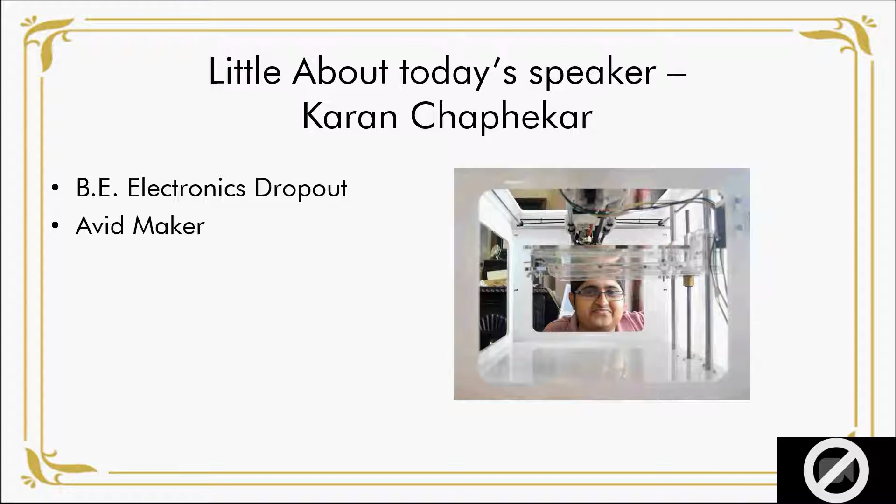A little bit about me. I tried to do my Bachelor's of Engineering, but I was not good at academics. So when I dropped out, I was doing these kind of projects. This is one of my printers.

So let me explain what a 3D printer is. A 3D printer is an additive manufacturing method. Instead of taking a block of wood and carving it to make our object, here we are adding material to make it.

This technology is about 30 years old. It was used by NASA also for some space shuttles. But why are we talking about it now? The reason is patents. The patents for this technology, FDM technology, which we are going to focus on, where we put the plastic material using a mechanical system, expired around 2009. Because of that, the project started in parallel - let's try to develop our homegrown 3D printer. So that was the concept.

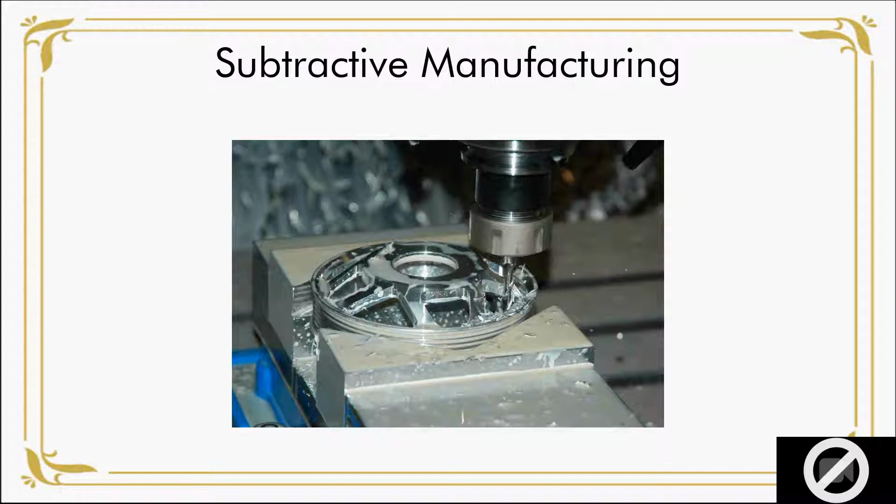This is an example of normal manufacturing that you might know of, where you take the whole material and using a drilling machine, or what they call end mills, you try to make your part, whatever you want to make.

One more thing I want to mention is this whole project is not my invention per se - it's more about the implementation that is unique to myself. This is a whole open source project. What open source means is that the main files, whatever the software, whatever the hardware, are freely available, so you can also make your own 3D printer, because the community of 3D printing enthusiasts have come together to make this possible.

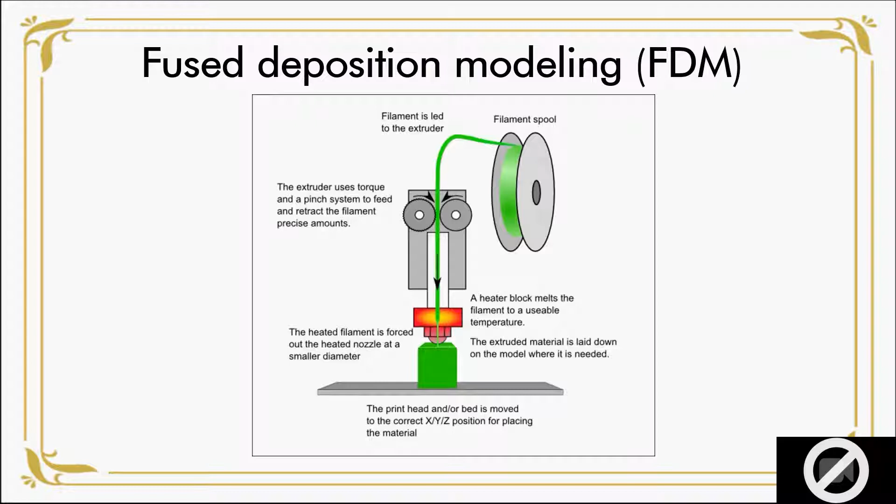So let me give brief information on the main parts of an FDM 3D printer. You can see a filament spool up there. That green filament spool goes inside an extruder. An extruder is basically like the sugarcane juice machine - ganne ka juice - you can imagine the sugarcane going in and the juice comes out. It's very similar to that, and there is a heating chamber with a small hole where your melted filament comes out.

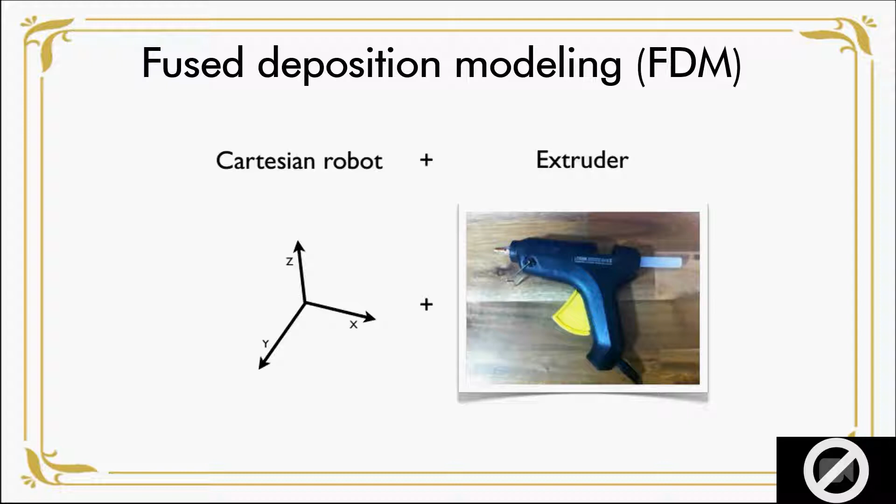The fused deposition modeling method is what we are using. We are using a robot to move an object, and for the extruder, you can imagine it as a glue gun. So what we are doing basically is squirting plastic on a surface, and where the plastic is squirted is decided by our 3D printer. As one layer is solidified, we build another layer on it.

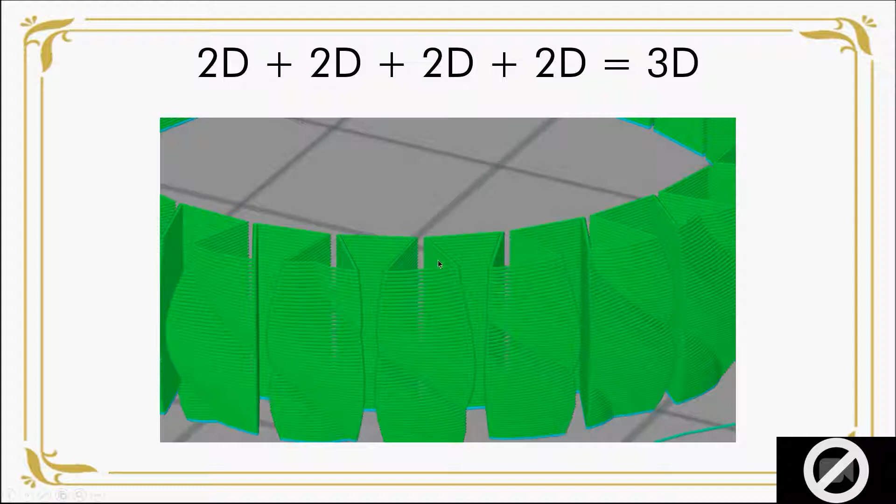In this photograph you can see these lines, made out of plastic. This is the hardware, as I mentioned, X, Y and Z axis. X is left and right, Y is back and forth, and Z is up and down.

What happens is you require a 3D model to make this. A 3D model is not a photograph, you have to understand. It can be made by 3D scanning, which is one technology that's not common, or by using AutoCAD-like software. We are going to use another software called Tinkercad today to showcase it.

With these systems, you can make whatever you want in 3D modeling. It requires a little bit of skill, but once you've made that 3D model, the software developed for the 3D printer can take that model and recreate it with, I would say, 0.2 mm accuracy on the printer.

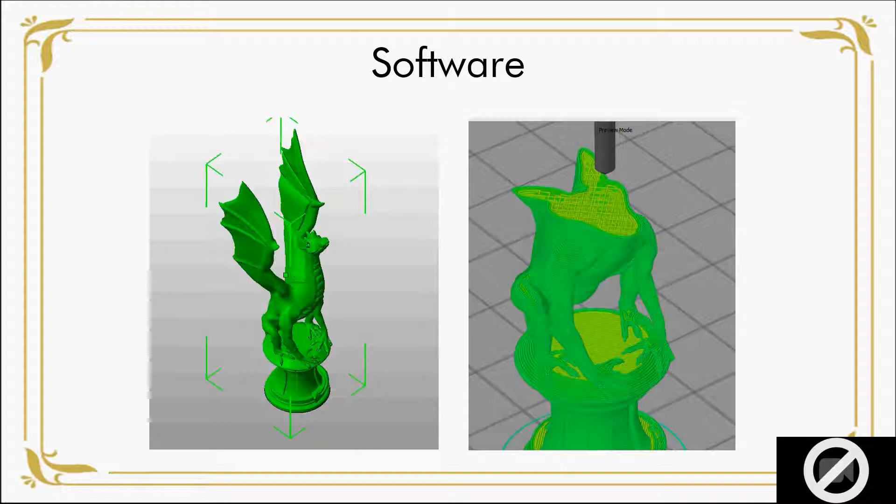So what you saw on the left is the 3D model, and the right is what the software came out with. The software decided where I want to put the plastic and how, and after that you have the 3D print, the object that was designed before.

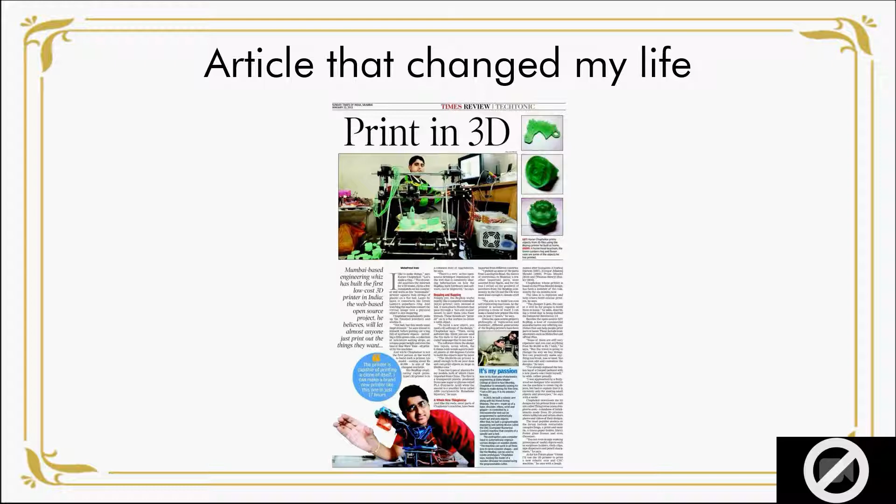This is the 3D printer. This article came in Times of India. These are some of my 3D models.

When I started making this, I started selling these also as kits, so whoever was an enthusiast could buy them. This is the one I was showing in IIT, if I'm correct.

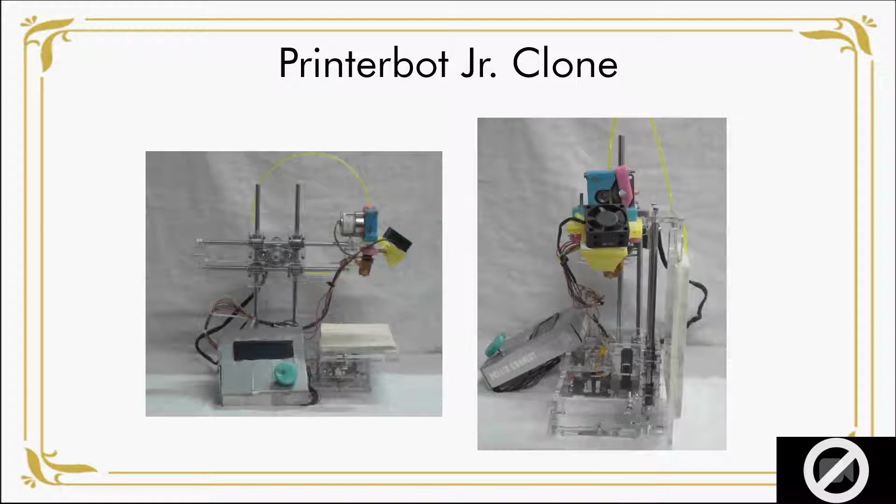This is another 3D printer. If you can see on the right, it actually can fold itself, so you can fold it and carry it. It's a sort of a clone of another popular model, and you can fold this.

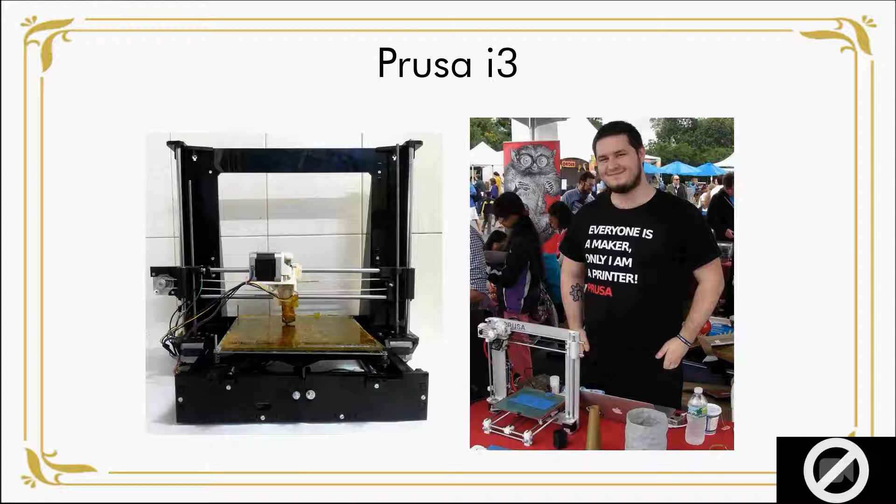He lives in Czech Republic, in Prague, and right now his 3D printer line is, I think, the most popular in the world. They are all open source, so they don't keep any patents, and they are still making business out of it.

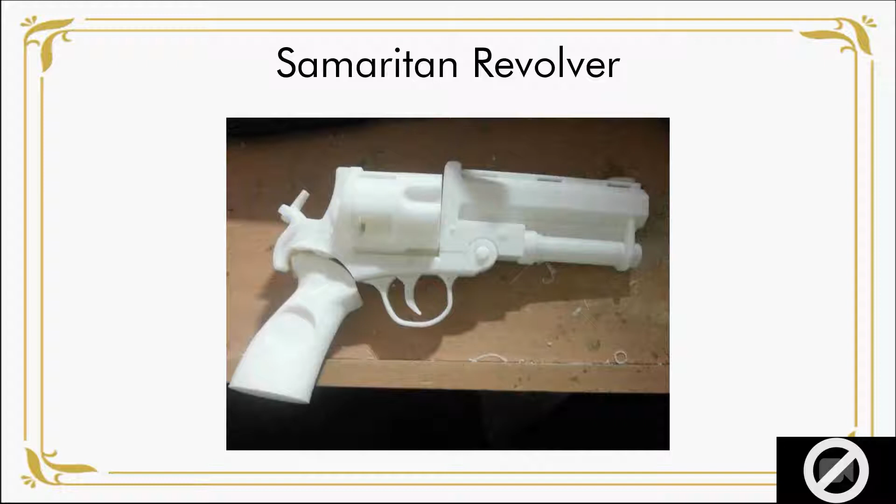This is a movie called Hellboy, and you can see this gun in Hellboy. So what I did, I downloaded the 3D models and made this gun on the 3D printer. Of course this is not a real gun, it's a toy, and I just painted it.

You can change colors in between on 3D printers. Different colors you can make.

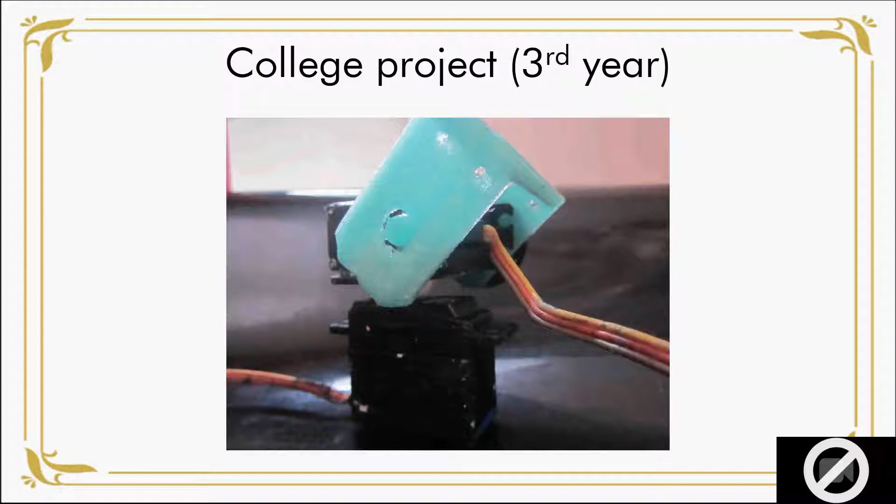This is my college project for third year. It was basically a CCTV camera model.

One more advantage of 3D printing is you only have to carry the raw material. If you want to make a spanner for a specific specification, you'd have to carry every spanner because you don't know what you'll need. But with a 3D printer, I can just take a piece of plastic and print it wherever I want.

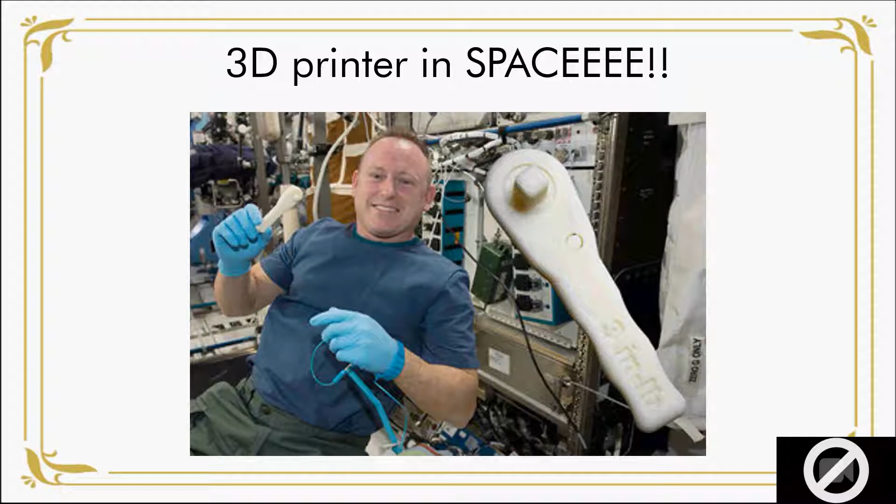So this is actually a wrench made in the International Space Station with a 3D printer. So the technology is very versatile.

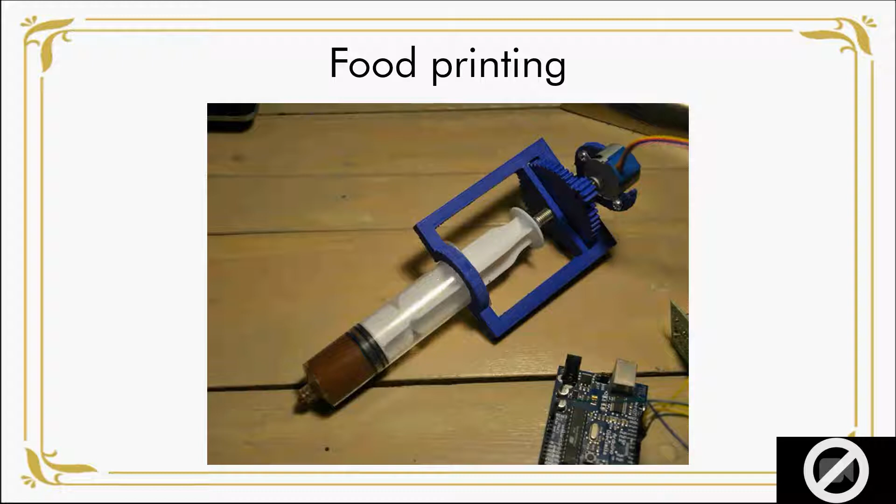Now with 3D printing we can extrude plastic, but we can also extrude other materials. So this is an example where chocolate is inside the syringe, used to make a chocolate 3D print. You can make a small toffee or chocolate in whatever shape you want, completely customizable. You can imagine these things in 5-star restaurants or high-end cafes where you want something very customized.

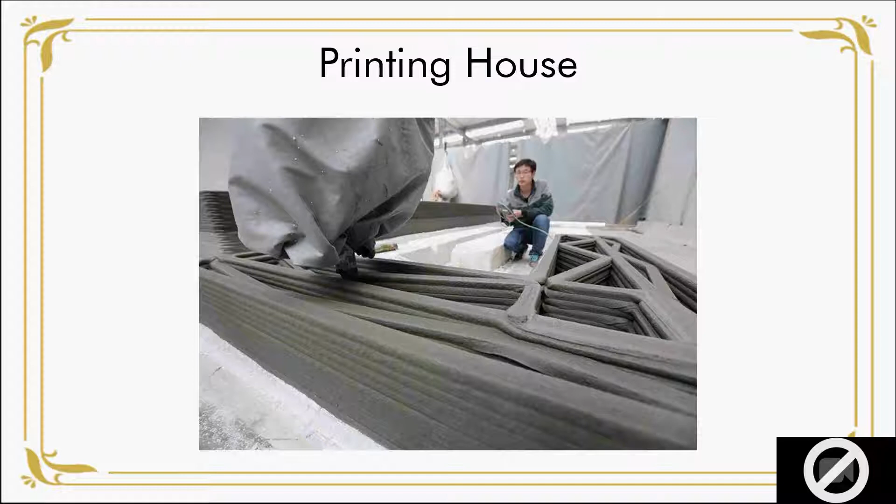This is another thing - you can 3D print houses, also in China. This is a 3D printer depositing concrete layer by layer, making these houses in 24 hours. So you can imagine how fast you can do 3D printing even at large scales.

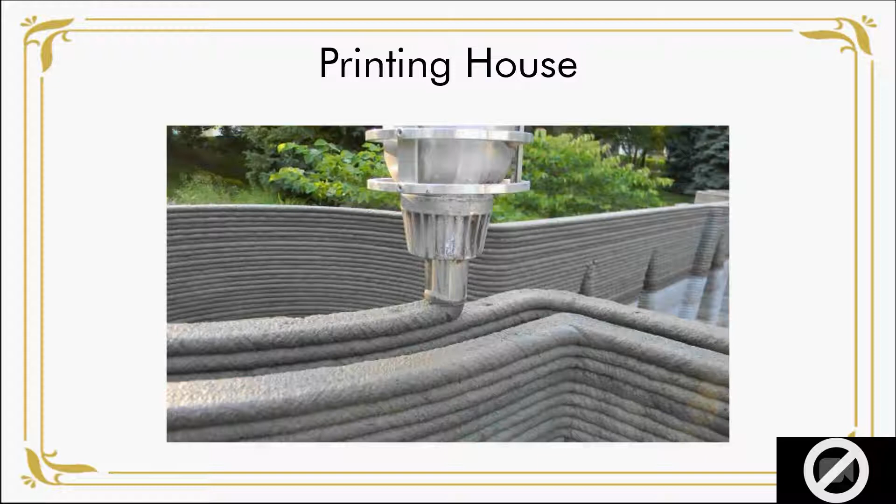This is another one - this was not in China, it was, if I'm correct, in America, made by a father for his daughter because she wanted a princess castle. So he made a 3D printer which can work on concrete, and made this castle out of it. It's a very wonderful thing.

So that was the presentation, and now we will move to the 3D printing part of it. What we are going to do today for demonstration is go through the whole cycle of 3D printing, which starts with designing. So we are going to design it.

What we are going to use is a website called Tinkercad. You can go and register yourself whenever you have free time. This website is basically a 3D modeling software, but you don't have to download it - it's online.

So on the right side you can see there are various shapes here, and you drag and drop these shapes onto this main page. You can zoom in, zoom out, change the size of this, and put in exactly how many millimeters you want, so you can make your objects out of this, and you can combine and subtract.

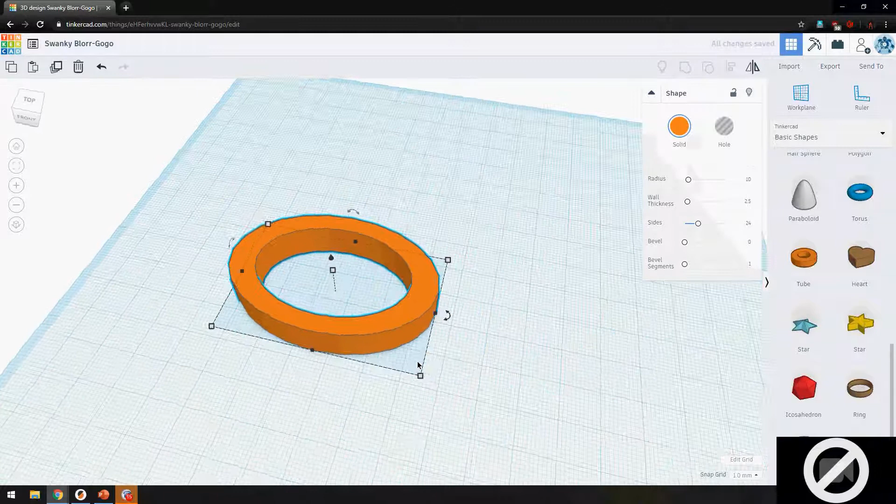For example, let's say I have this block. I can name it green, I can color it green - the color here doesn't matter, because color is only for representation here.

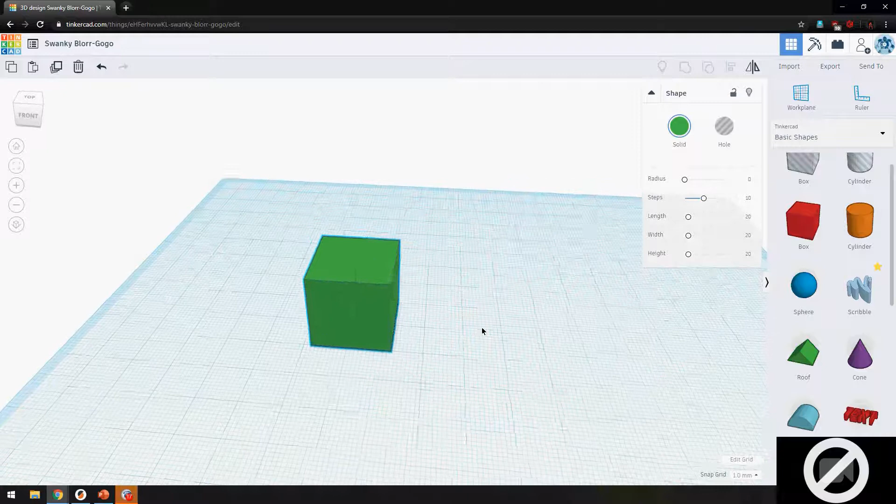Imagine I take another one - let's say I want to make a small house, so this is a roof. I can keep this roof on top, and then I select both of them and click merge. So what happens when they are merged? They are now one piece - they are no longer separate pieces.

Now, on the other hand, we can take any other object, and as I said, I can change the color, so I can set the color as hole. Hole is, you can say, like a negative - so I define it as a hole, and when I group this together, it carves the piece out from my main model.

You can see the spherical part is carved out. Okay, so using this method we are going to make a simple keychain.

So what we are going to do today, we are going to take this text format. So we have this text, so we are going to type something here. So we'll write MSS.

This text has a height of say 10 millimeters here, but because we want to print this model also, I'm going to decrease it to just 5 millimeters. So you can see we have made this text.

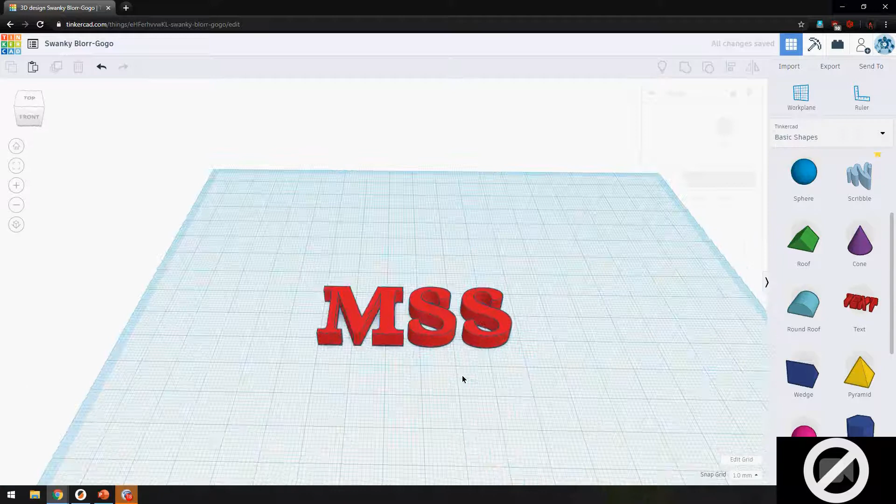Now if I go and 3D print it right away, what will happen? It will create 3 letters MSS, but they are all separated, like letters used in number plates or something. So what we are going to do, we are going to take a box.

Okay, so these alphabets, if I print them as it is, they will come separately. So what we are going to do, we are going to take a box.

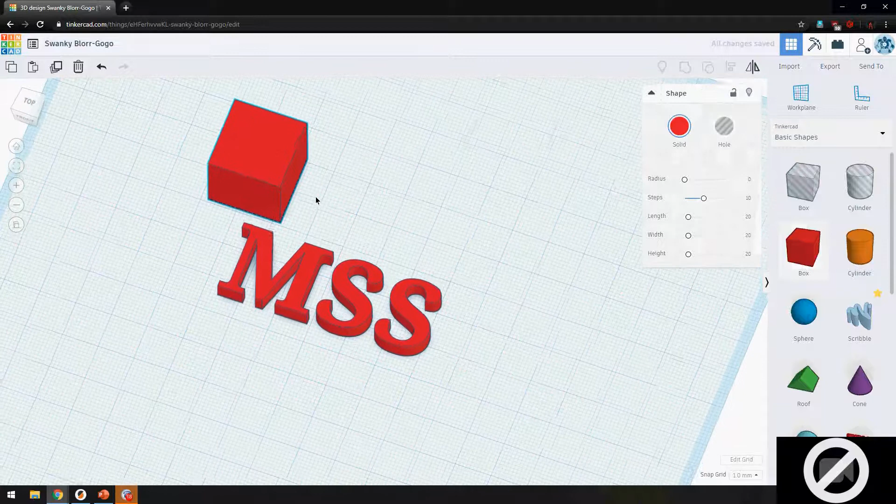I have taken this box here, and I am going to put the height as 2 millimeters right now. I will slow down a bit. Then let's color it differently.

Now what we are going to do, we are going to increase the size of this box. We'll make sure that it fits this size. So if you can see it here, MSS is on this plate.

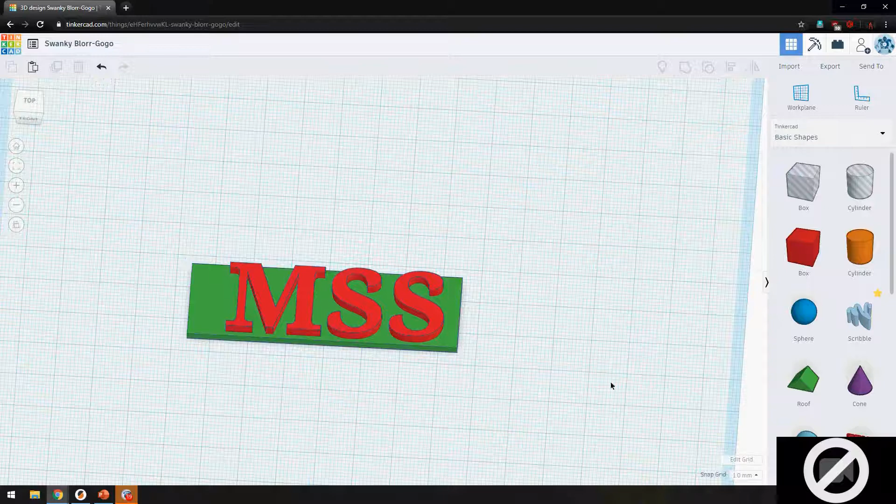Now when I print this, what will happen, because of this plate, this will be more like raised lettering, or whatever is opposite to embossing. So what we are going to do, as we are making this as a keychain, we require a keychain hole. So we are going to take one cylinder.

As I showed you before, we can combine objects, and we can also remove them. So I will define this cylinder as a hole or negative cavity. I'm going to make it smaller.

Let's say 10 millimeters by 10 millimeters square, so I can type 10. I will zoom in so you can see it clearly.

Now we are going to take this cylinder I made and put it where I want my hole.

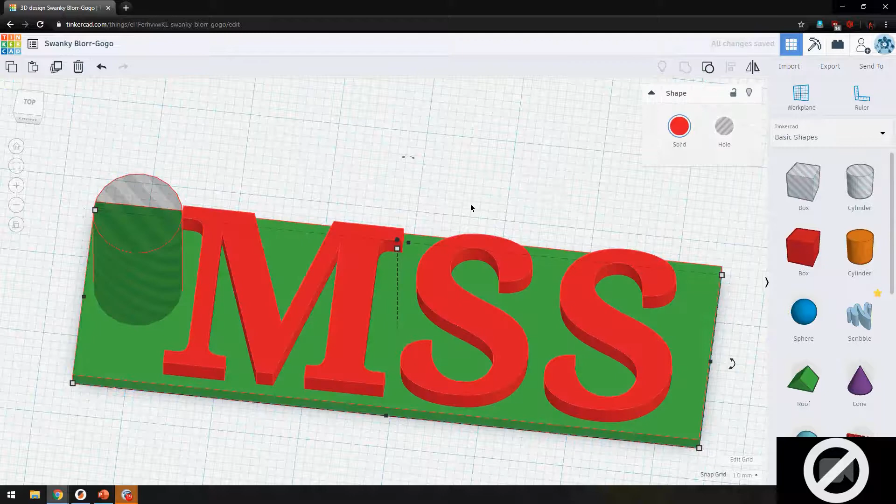So what will happen when I combine all of these three parts, which is our MSS lettering, the base plate, and this hole, it's going to make this into one object. But as you remember, we kept the cylinder as a hole, so what will happen? It will just remove that part from my main model.

So what we are going to do, this keychain is ready. It's a very simple design, and we are going to export it into a format called STL.

So if you know Photoshop or CorelDRAW, you know you can export a file in a format called JPG. We are all familiar with JPG format, it's a very common format for our photographs. But once you have exported it, say from CorelDRAW, it's hard to edit it. Similarly, with the STL format, when you export it, you can't edit it easily.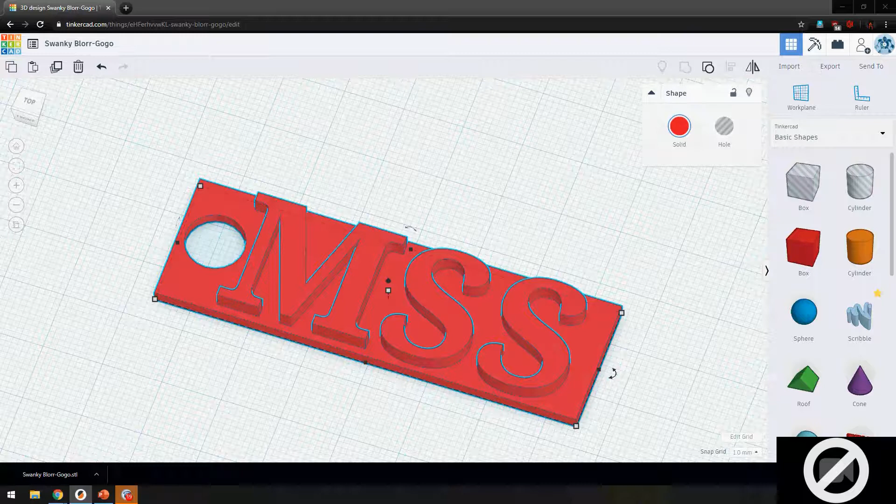So I'm going to save this, and now I'm going to introduce another software which we are going to use very briefly to convert this model so my 3D printer can understand it. These softwares are called slicers, and they are specifically made for 3D printers only. What they do is take a 3D model and convert it into a language that my machine can understand.

Yeah, we can use Blender also, we can use any 3D software. I got a question, yeah, you can use Blender also. So what will happen, we are going to import our file we just downloaded.

You can see it here. So this square piece is my build plate of my 3D printer. So this is as big as I can make an object. Also there is a height limit, but it is not shown here.

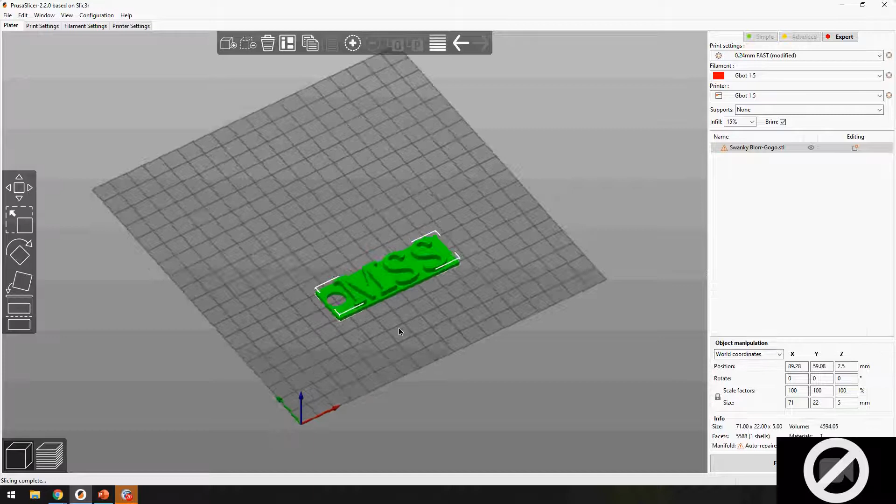So I'm going to just place this in front, and there are a lot of settings involved. I'm not going to go in depth on the settings, but basically I select the settings. I will answer the questions afterwards, when we are 3D printing, I will go through the chat and answer them.

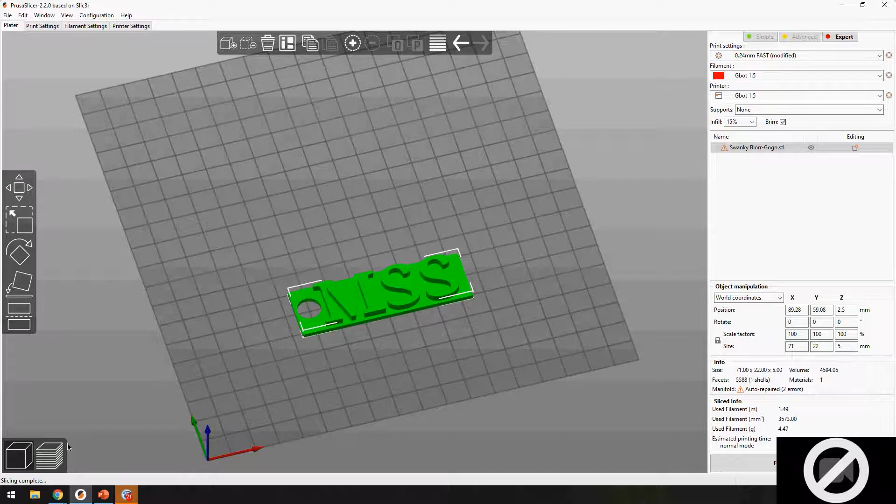When we are 3D printing, we don't actually print complete solid objects because it's a waste of time and materials. So we tell the software that we want a certain percentage of fillness, called infill in 3D printing terms. We have set it to 15%, so right now the object is filled by plastic 15% by volume.

As we go further, it closes our top plate and then goes for the lettering. This whole print will be 21 layers and it is going to take 20 minutes. So what we are going to do now is send this file to the 3D printer.

Now my 3D printer is attached to my Wi-Fi, so I don't have to connect it to my PC. In other 3D printers the method is that you require an SD card, but we are just going to send it to our 3D printer wirelessly, and it starts 3D printing.

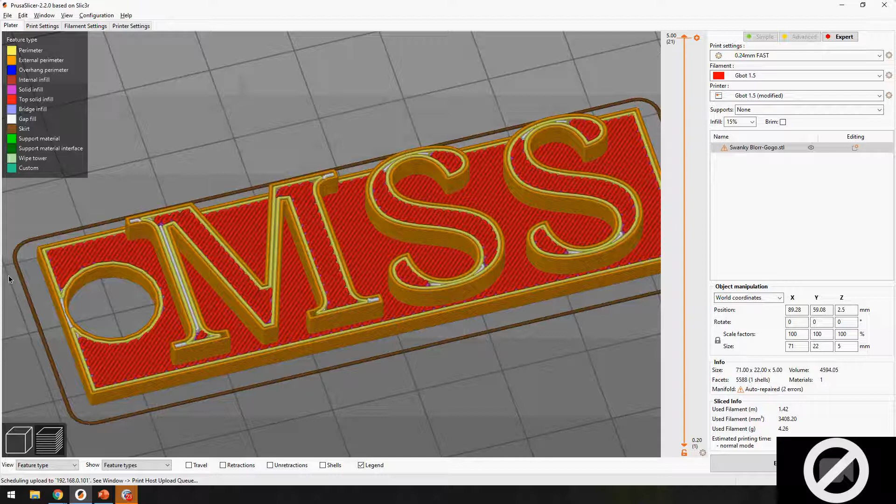Right now I will show you another view where you can see my 3D printer's interface. This is something called OctoPrint. It's working on a Raspberry Pi if anybody is interested. It's basically a small computer on my 3D printer which makes its own server page, and I connect through that.

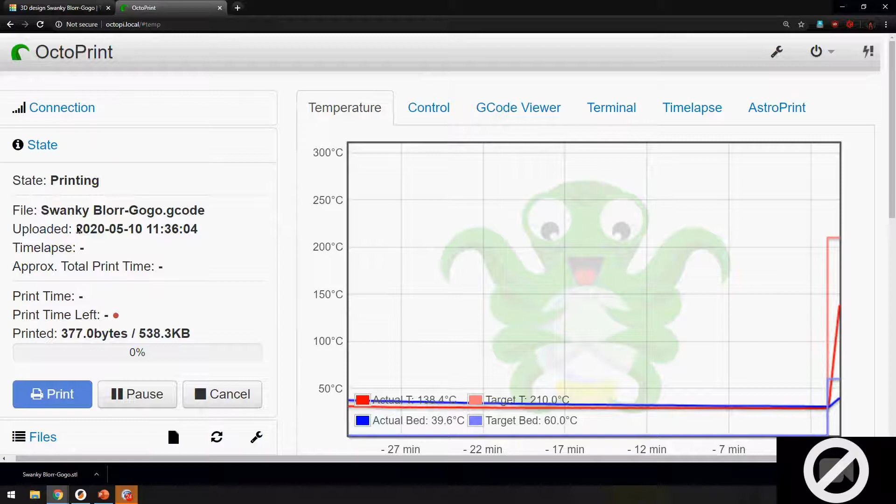So you can see these graphs here, let's see if I can increase the size. You can see that our temperature is increasing. I told it to increase the temperature, and this is a random file, this is when it was uploaded, and this was the size - it's half a MB of a file.

If I show you the same view, I can see it here, the G-code view. Let me explain - this is basically a live view that will show us what is getting printed right now on the machine. After this, when the 3D printer has started, I will move to my phone camera and show you the 3D print.

Plus one more thing, actually I can show you it right away. I've attached a camera also, so I can monitor it from anywhere. It's actually connected to the internet too, so if I'm somewhere else, I can connect to my 3D printer and see the progress. What you are looking at right now is the head of the 3D printer.

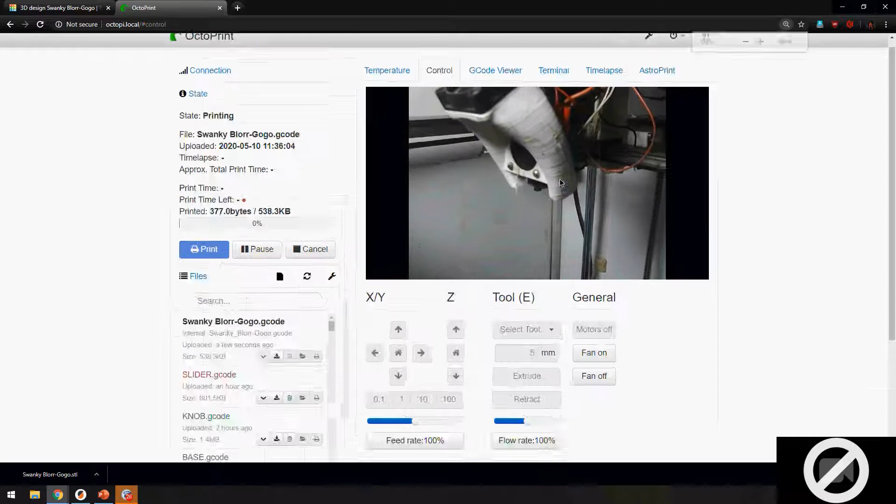Now I'm closing the presenter access.

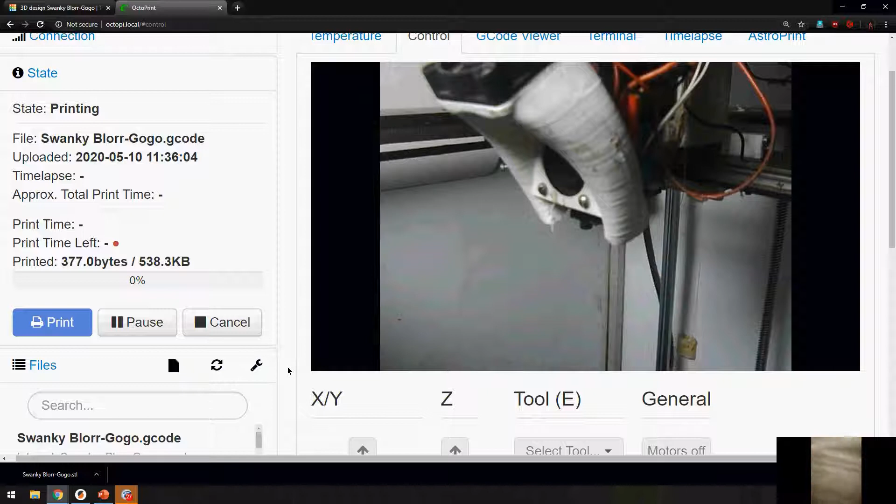So I will show you my phone view. You might have to click on the camera view that I have, and I will show you the 3D printer. Just on the top right corner, if you can see, there is Karan's camera view that is already on. Karan, if you turn off the presenter screen, you can actually put it on main view, or do you want to show something on the screen?

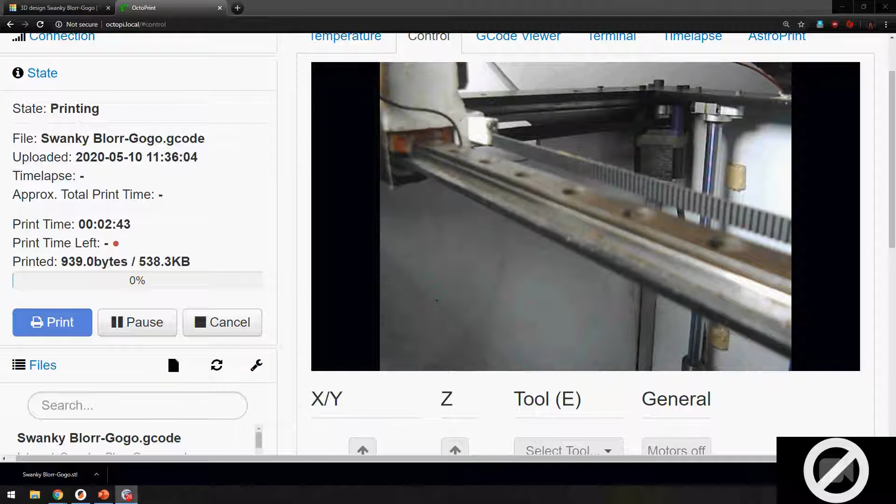So this is the 3D printer. Let me try to explain what is happening. On the back, these are two motors here which are controlling this center section. So two motors in the background.

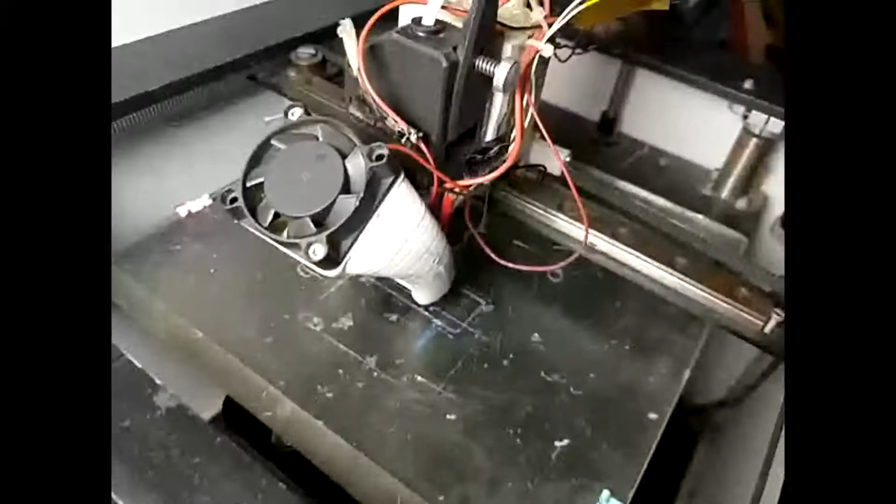So what is happening right now is this bed is getting up. Now you can see there is this filament going in. This is the plastic, so our object will be of blue color. This plastic is getting pulled here in this unit, and this unit is pushing it out, and you can see the plastic is coming out of blue color. I can show you from this angle.

So you can see it's actually putting the plastic. I will keep it in the horizontal only, so it's consistent. I will keep it steady. There are a few fans also, because they help the cooling of the plastic.

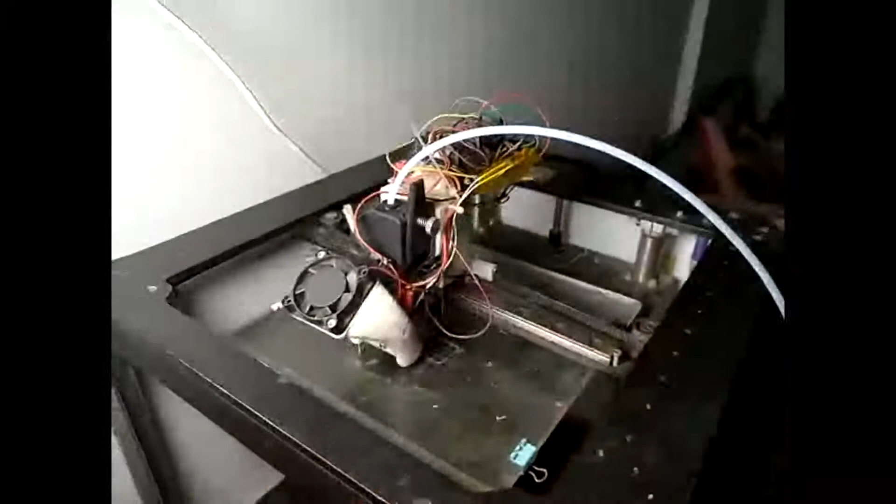So the bottom layer is generally printed really slowly, because we need to make sure that it is getting stuck to the bed properly. Let me give you another overview when it's printing. As I told you, there are two motors in the back which will help in the motion, X and Y motion. Two motors in the back.

Then there is another motor which is actually inside this body, but is attached to this middle rod. You can see this middle rod. So this middle rod, when it rotates, it's like a screw. When it rotates, the bed goes up and down. Whenever one layer is drawn properly, the bed will go down a little, about 0.24 millimeters, 240 microns, and the 3D printer will start printing on top of it.

Now there is another motor hidden inside this unit. This motor is actually doing the job of pulling our plastic, and it's hard to see. Inside here there is a nozzle, heated at 200 degrees Celsius. Due to this 200 degrees Celsius, the plastic is getting melted and coming out of the nozzle. The nozzle's diameter is around 0.4 millimeters, exactly 0.4 millimeters. By this information our machine will know how much plastic to extrude.

There is another fan which will turn on afterwards, like right now. So now the first layer is done, and the machine is also sped up. See, it's doing outlines first, then it's going to start filling the inside part.

What we are going to do here is, when our base plate is done and it's time for lettering, I am going to stop the 3D printer in the middle and change the filament to another color. So you can see the difference and how you can do multicolor printing here. It's typical for a keychain, if you change it in the middle you can see a nice contrast in the 3D print.

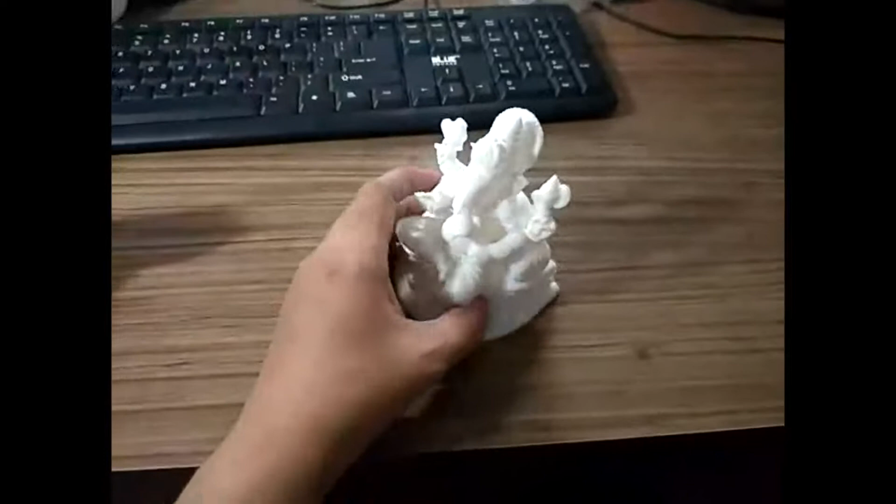Meanwhile, I would like to show some other 3D prints that I have. So this is a model of Ganpati. This was downloaded, and I think it was made by a method called photogrammetry. What happens with this method is, you take multiple photographs of an object, in this case a Ganpati Murti, and you put it in a software. What the software will do is try to understand how the model actually looks and try to convert it into a 3D model. The quality is not always good, but you can get a generalized idea.

Now another thing I was printing for preparation of this is a mobile stand I was trying to make for a tripod. I was just printing one more part, so I could have done a phone stand instead of holding it in my hand. If you can see, there are these screws here, so this is a nut and a screw.

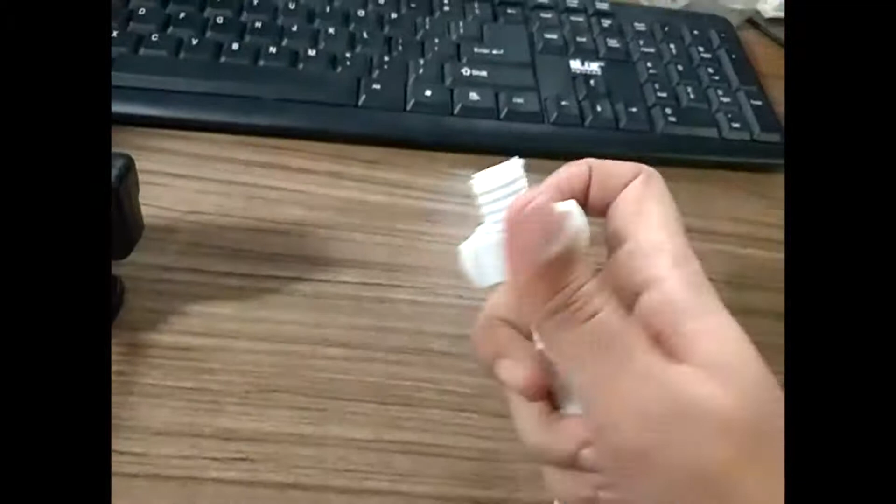So this is a nut, screw and bolt system here, and you can see how tight tolerances or accuracy you can get with this print.

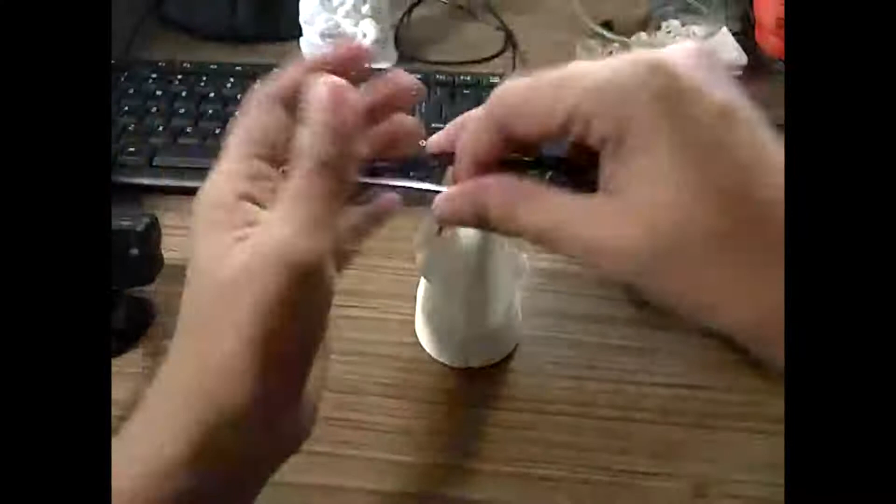This is another fun print, basically my glasses holder. Very simple 3D print, just for fun.

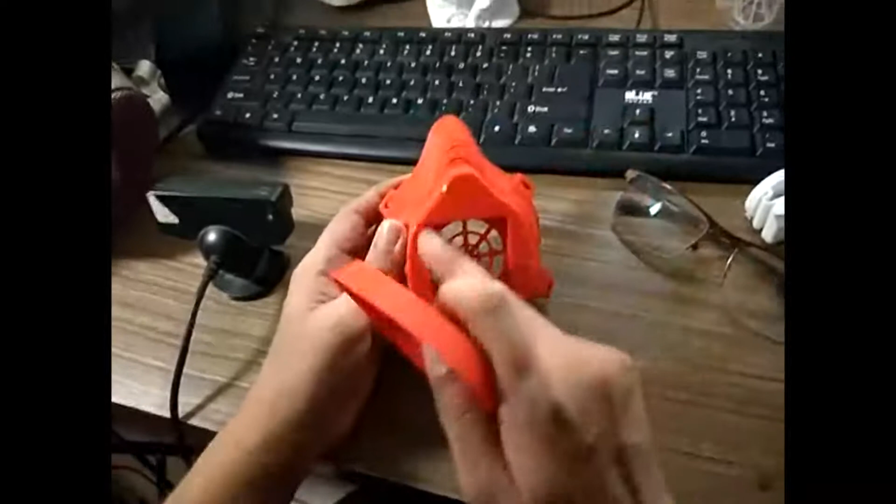So right now the corona pandemic is going on, and we're trying to make these masks so you can add filters in them, and the filter can be replaceable. This is actually an FDA approved design. The advantage of 3D printing is I don't have to wait for a manufacturer to make it, I can just make it myself on the 3D printer.

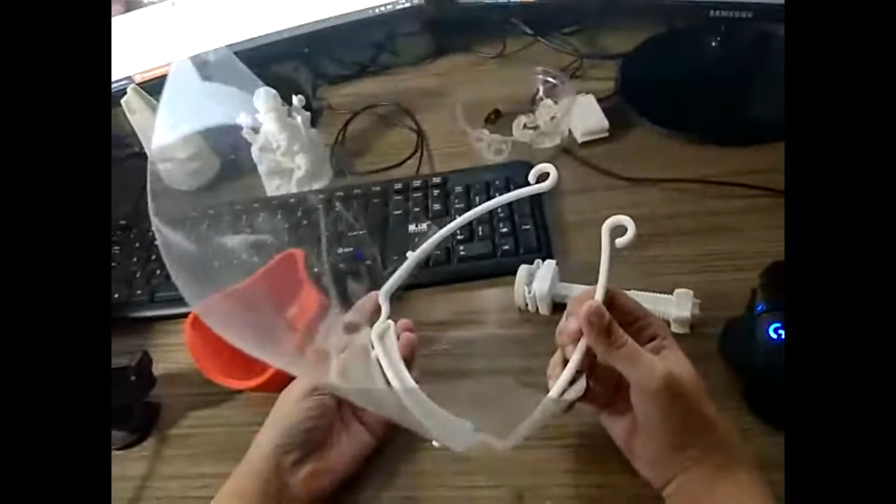Another thing we're making with a group of people called We the People, like We the double-P people, PPE. These are face shields. This part is 3D printed again in 20 minutes, and this is a sheet. This is used by medical and police professionals, like an addition to a mask, so nothing gets on your eyes and skin.

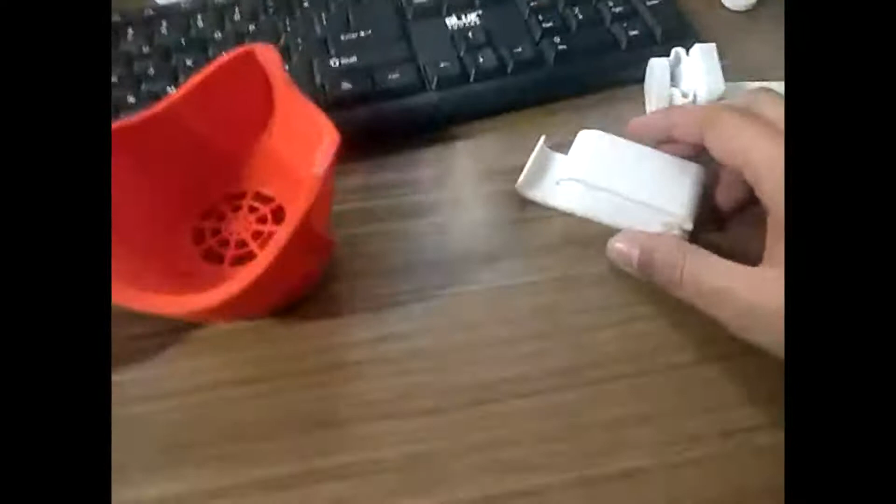Another simple object, this is a phone stand. Okay, the phone stand is broken, it's fine.

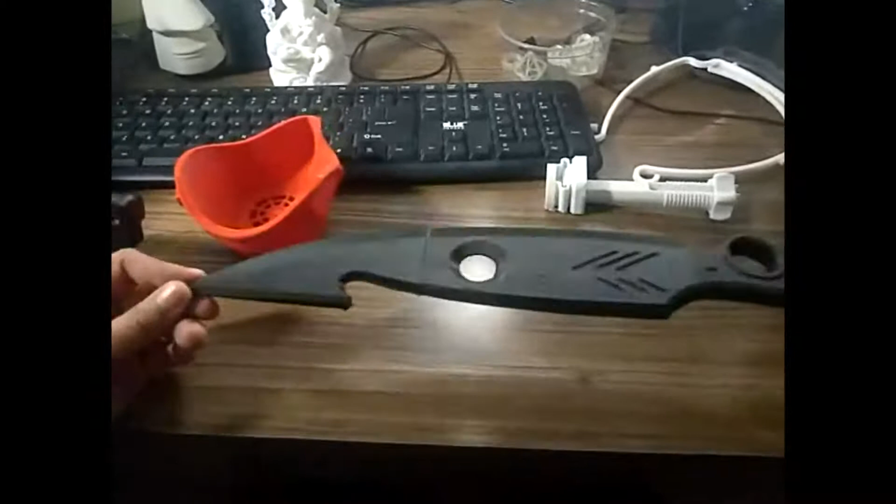This is, I like to make these kind of things. This is basically a hunting knife from a video game called Destiny. I like to make stuff from video games and movies. This is again a 3-part print since my machine cannot print this big, so the model was made in such a way that there were 3 parts, and then you combine them. It's a pretty big print, you can see.

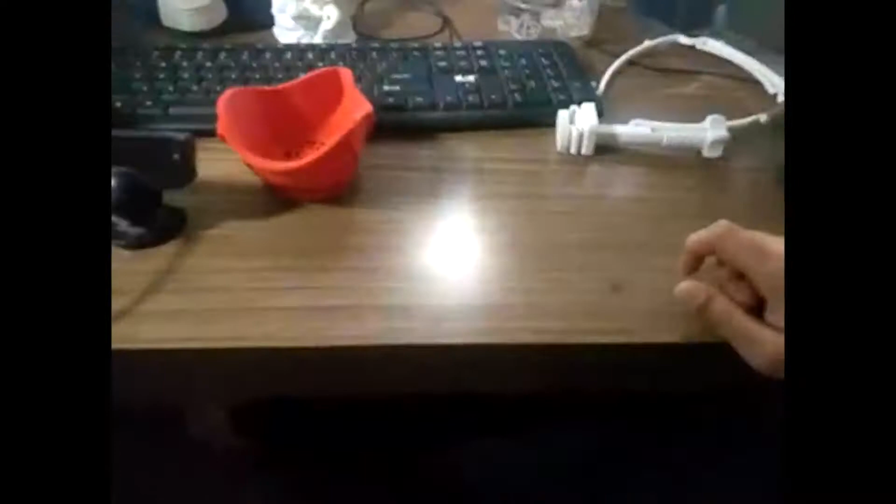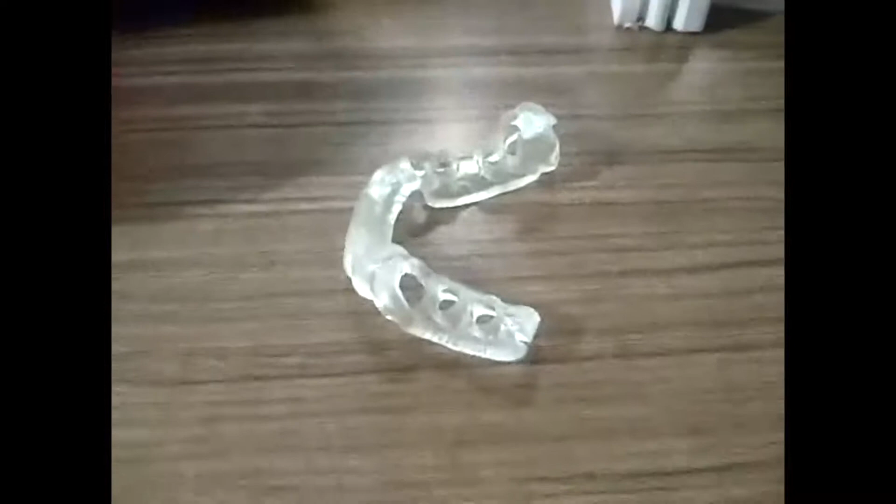Another thing I'd like to show, including this 3D printer, I was just talking about another 3D printer which is a liquid 3D printer, which can do very highly detailed work, you can see. This is a denture, basically used when you are doing root canals or adding new implants, this is custom made.

So the doctors send me this file. They have taken the scan of the tooth structure and gums, decided where they want holes, and sent this model to me. Now they're going to use it on the patient, using these holes as a guide for drilling.

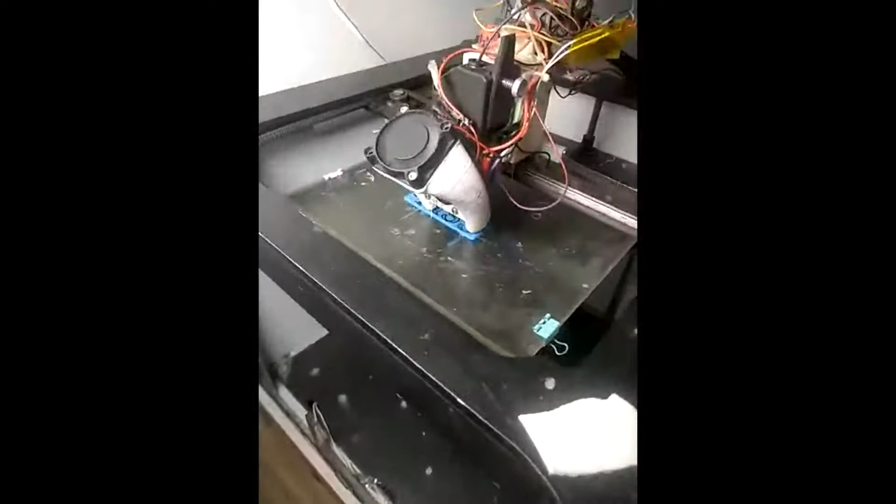Hello, can you hear me? Yes Karan, we can hear you, and we can see the printer also. In the meanwhile, I changed the filament from black to blue, and you can see right now it is making the object in blue color.

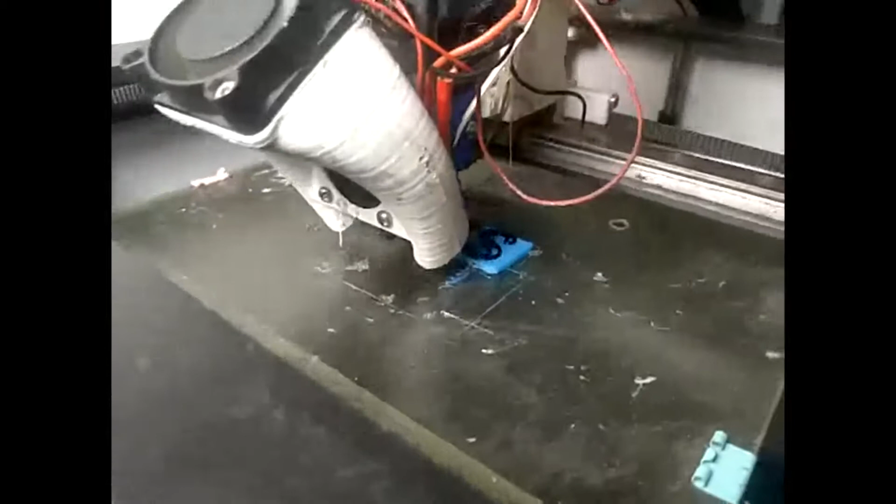There is a lot of work going on to make human organs out of 3D printers. The idea is to make a structure out of sugar or some material that our stem cells will require, and then stem cells will build around that object. Imagine a small sugar tube, and the cells will develop on them, eating the sugar, but then creating a coating of cells. So yes, there is some work happening in biology.

In terms of edible printing, yes you can, there are chocolate 3D printers and sugar 3D printers. In the sugar 3D printer you can have colors too, because there is a small inkjet module on it, so it can use edible colors. If you search, there is a 3D printer called Foodini, with food, which is specialized in food 3D printing.

Thank you, Karan. Vikrant Mahulkar asks, are all 3D printers able to read only G-code and STL files?

Not all 3D printers. When it comes to open source 3D printers, all of them read G-code, that is a standard. But some companies try to avoid people hacking their machines, so they have their own custom format. None of the machines can read directly from STL unless you do a lot of jugaad there.

I can set it up so that if I feed an STL file, my Raspberry Pi will convert it into G-code, but at the end of the day G-code is what the 3D printer requires. Going from STL to G-code is just a process of two clicks, honestly, so it's not a big deal, but you cannot take any random G-code from another 3D printer and use it here, because each printer is different.

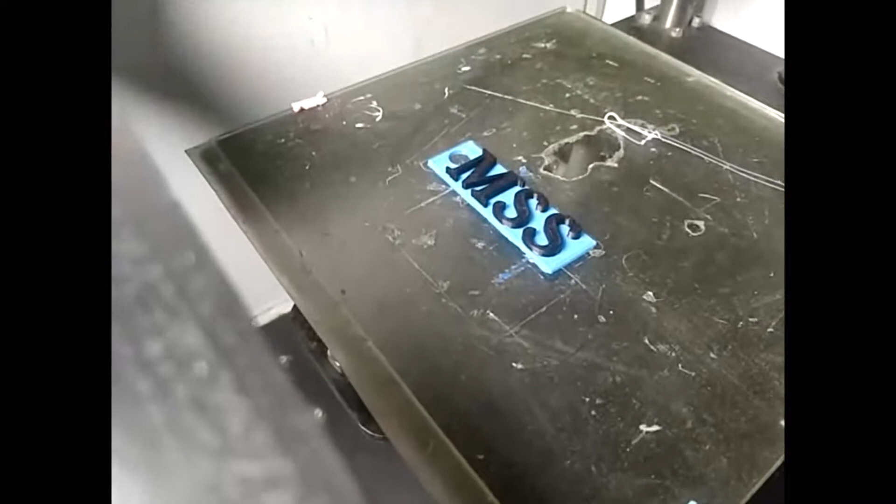From Python, if you make a script to create a 3D model, yes you can use that, but end of the day the 3D printer will require a G-code file, not another kind of code. Python is such a huge language, so I don't fully understand the question, but actually the older slicer software versions were Python based.

Right now our 3D print is done, the machine has parked and the bed is coming down. I'll let it cool down and remove the print to show you. Next question, one moment.

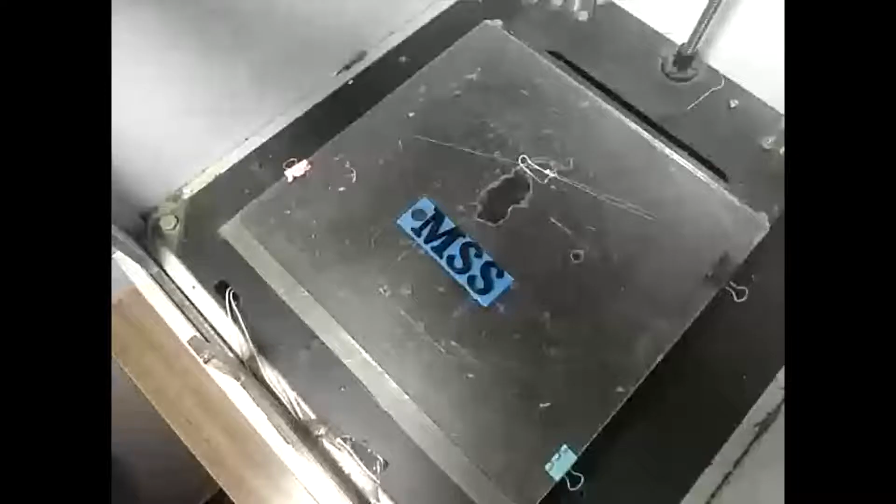Pranav Oak is asking, can Blender be used for both modeling as well as slicing purposes? No, Blender is only for modeling. For slicing you have to use some other slicer. There are various slicers in the market, I'd say 90% of them are free, and there's only one slicer which is paid.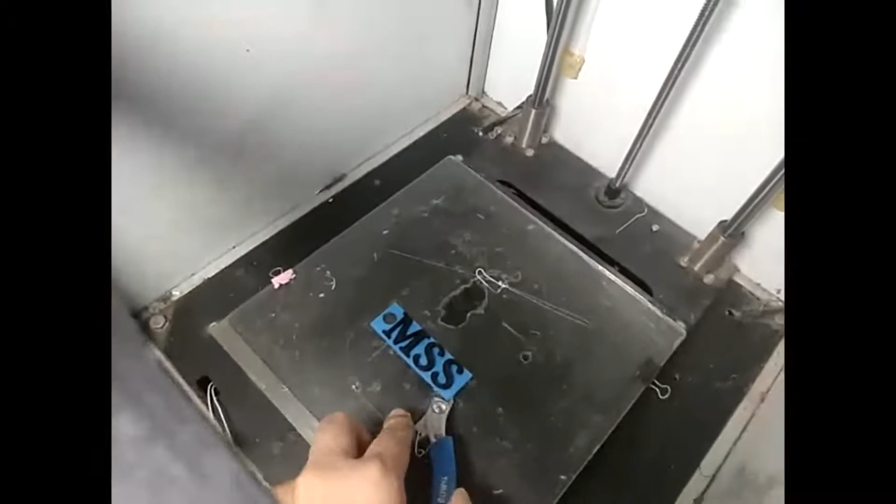Generally when you buy a 3D printer — this printer is made by me so it's not available in the market — but nowadays you can get 3D printers on Amazon for 15,000 rupees, and it's pretty good honestly, not a bad 3D printer at all. With that printer, software comes by default, and online you'll find various other software options.

Mr. Sadekar is asking whether 3D printing can be done with only plastic material. Yes, right now the printer you're looking at is only for plastics.

But yeah, only for plastic. But this plastic is actually not even oil based, it's a corn based plastic. It is biodegradable, but not at a high grade, more like a low grade, similar to how PET is recyclable. So it takes more time to disintegrate. But because we need certain properties in the material, unfortunately plastics are the only thing that can provide this.

But there are materials like, for example, I have a wax filament. So instead of plastic, it's wax. I got it from somewhere in the USA. You can print with wax, and there are some materials that take PLA material and add little powders of brass or stainless steel. I have actually made nylon plus carbon fiber, which is very strong. So these composites are available, but the base will mostly be plastic.

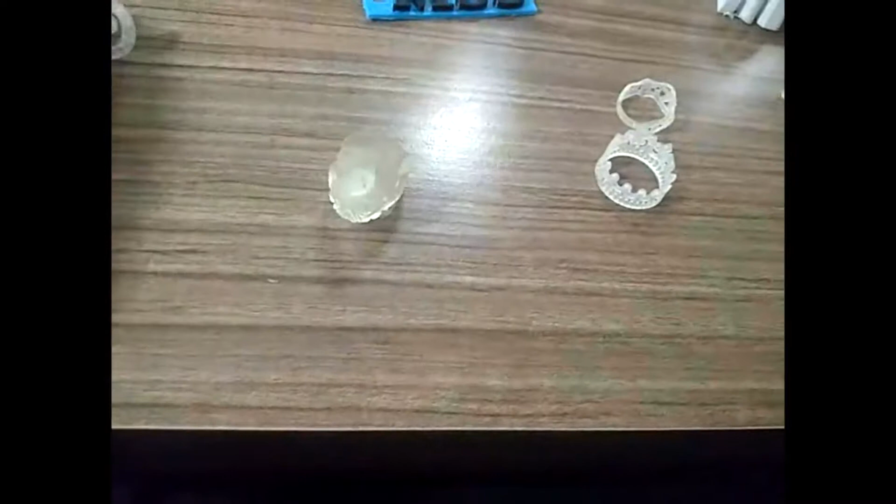Okay, Abhishek is asking: does the finishing touch depend on the plastic material used?

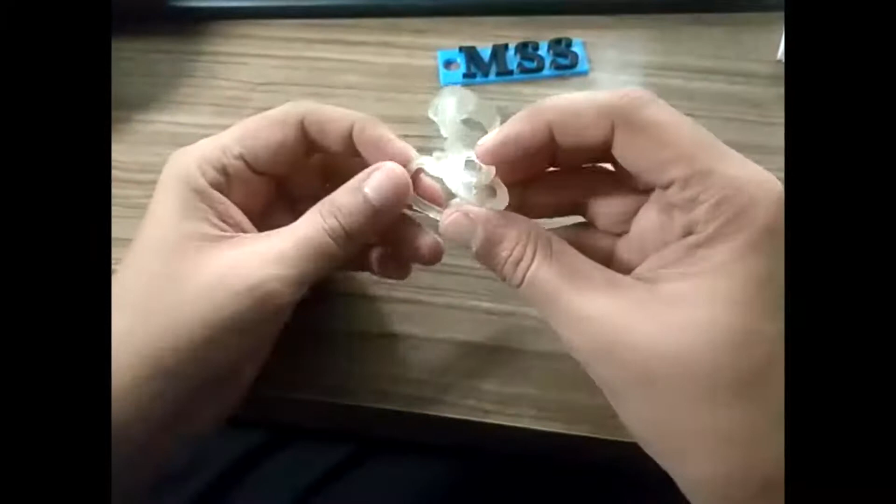Regarding finishing touch, I like to mention again, you can see these liquid 3D printer prints, they are very fine and very smooth. You can't see layers because each layer is about 0.02 millimeters. So you can see the detail, like in this snake ring. This is high detail stuff. Here each layer is about 20 to 50 microns, which is 0.05 millimeters. So you have an amazing finish here, because this was a liquid when it was made.

Now this plastic, depending on what you use, there will be a difference. The PLA and ABS, the most popular 3D printing materials, give relatively good results. You can see the sides of this Ganpati statue, it's pretty smooth. But if you want to paint it, you need to add a little primer, a spray primer, and after that you can paint it.

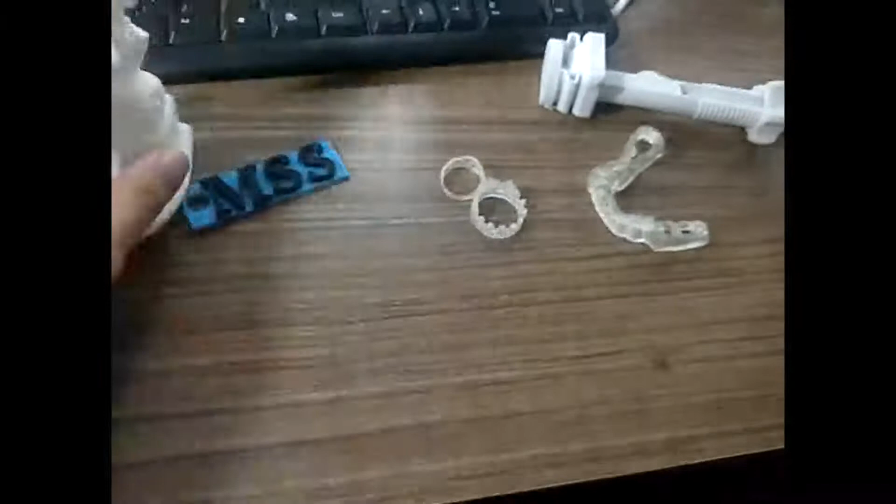But there are some materials like nylon. Nylon is used for 3D printing, but it doesn't print well, there are always some problems with it. So nylon prints are generally not for looking nice, they are for function. You have to understand 3D printing is not only about making statues, you can make actual functional parts. Like this white part here, and some other parts, these are all 3D printed.

So initially they mentioned, you can make a 3D printer out of a 3D printer.

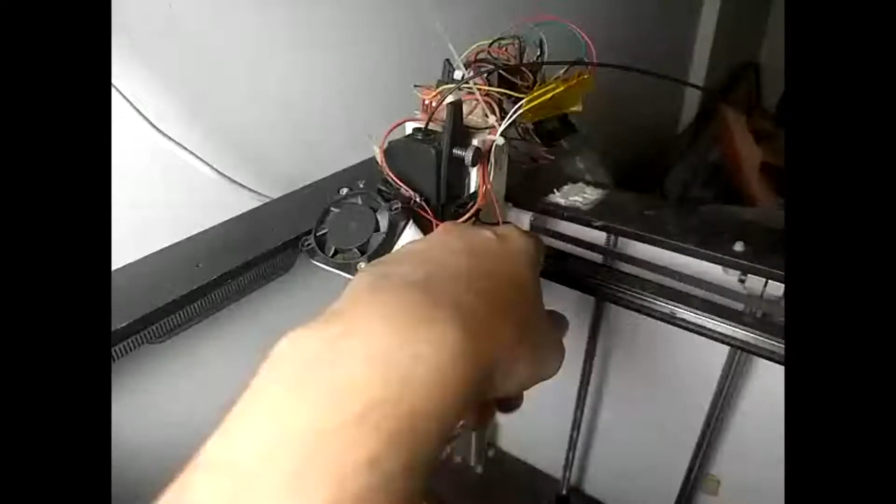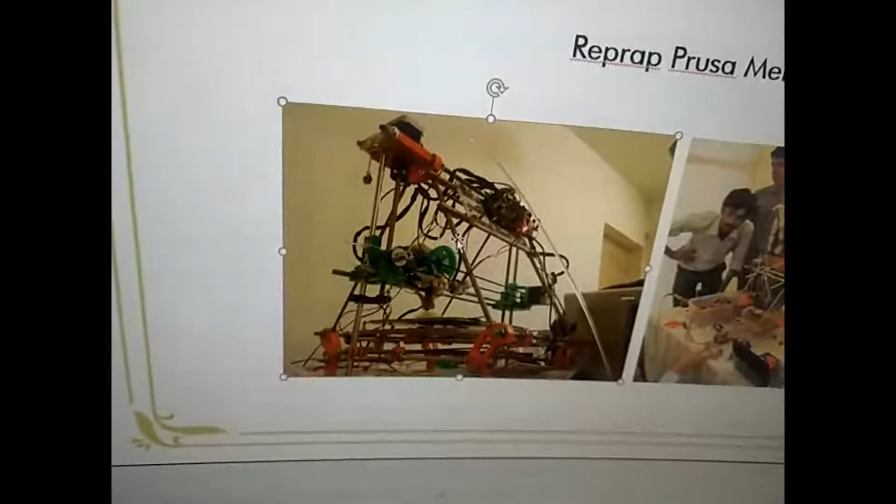So to repeat myself, many of these parts, like this one, are actually 3D printed. I can show you other parts here, this purple spacer is 3D printed. When I built my first 3D printer, the maximum parts were 3D printed. I won't do presenter access, but I will quickly show you my first 3D printer's design. If you can see, all these orange and green parts are all 3D printed, and others are just rods taken from the hardware store. So you can basically make a 3D printer out of a 3D printer.

And that is how the whole RepRap movement started. You can see the name RepRap, it stands for Replicating Rapid Prototyper. The idea for making this 3D printer was that it should be able to replicate itself, so when you have one 3D printer, you can make many 3D printers.

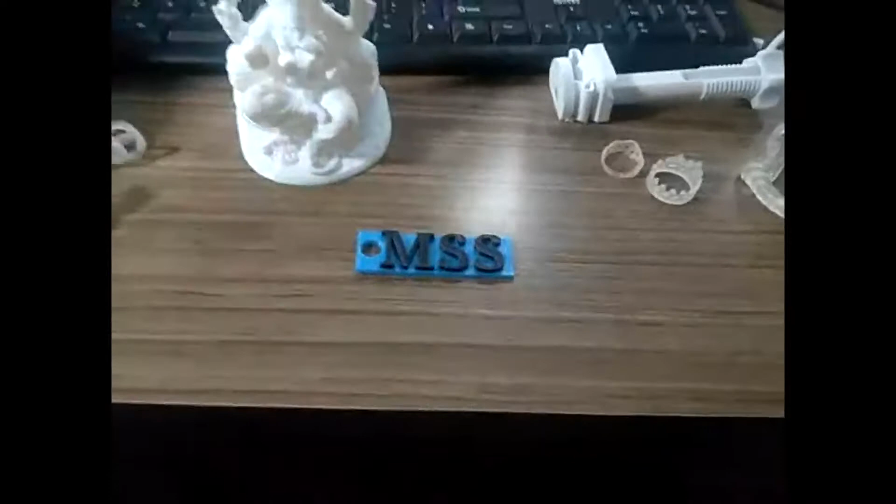Yeah, next question. Okay, two more questions from Satish Patankar: Do we have different printers for different final products? Are they convertible, and what is the cost of the printer you are showing right now? Okay, it's a big question, let's go step by step.

First of all, let's go for the price. This printer I built generally costs around 40,000, but a lot of R&D went into it, and generally I don't sell them anymore. We sell a different version of this to schools, which comes with a warranty and everything. Right now I'm not in the manufacturing business, but soon after this, actually before lockdown, we were planning to make a very cheap 3D printer that is also good and made in India. So yeah, we are working on it. Right now this one is 40,000. If I'm getting the other question right, it was about different types of printers for different kinds of finishes, am I correct?

For different final products, are there different printers? Yes, it depends on what the final product is. If it's jewelry, you go for a resin printer. If you need hardware pieces fast, you go for FDM printers. If you want them strong, use materials like ABS or PETG. If you want them flexible, use a flexible printer. So it's a combination of materials and printers. But generally, a printer decides its capability, meaning how detailed it can go, and what kind of material inputs it requires.

What you can do is, if I want to make this with a custom name on the back, or everything in a different color, then you think about 3D printing, where customization is key. For example, I cannot make this in normal manufacturing because each person's teeth structure will be different, every requirement will be different, so you generally only need 1 or 2 pieces. Or take custom jewelry as another example. So you should look at a 3D printer as a prototyping and customizable tool.

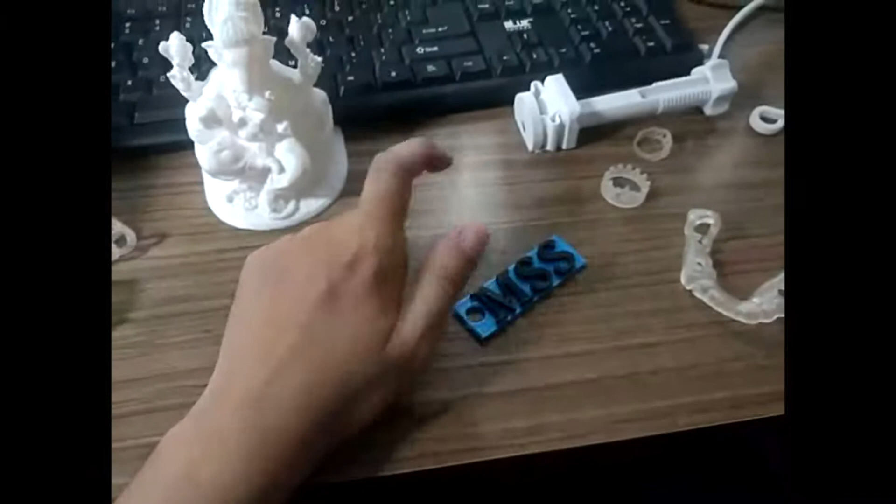If I want to make this keychain with a conventional method, I'd have to order at least 10,000 or 5,000 minimum pieces to make a mold, and the mold itself would cost another 25,000 to 30,000 rupees. But here I can make one of these for just the material cost—I used 4 grams of plastic, which costs 3 rupees for this keychain. I don't have to put in that much investment, and the turnaround time is much faster. So when you're doing prototyping, 3D printing is perfect.

One more question: in case of architectural models, does it require a 3D model from architectural software, or are detailed AutoCAD 2D plans with all dimensions and height mentions enough as an input?

No. If you have a 2D model, it won't be enough. You want a proper 3D model, so you have to use AutoCAD, or let's say SketchUp—SketchUp is another old software which was once owned by Google. You can use these softwares, but you need a 3D model to do that.

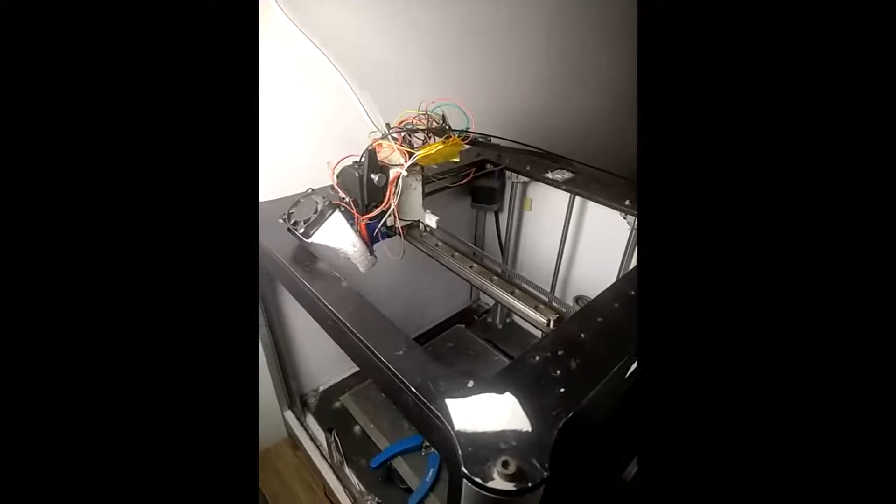It is developed by E3D, in Europe, so it's not a final product right now. It's in very much a prototyping stage because people are doing beta testing for it. But I think that is the best method to do multiple materials. You can have multiple of these units, but imagine if I add 4 of these units, I can't move much here.

So something like the tool changer method. There is another method where you have a Y splitter - a filament goes here, and instead of the motor being here, it's at the back, so it can pull one filament and push another. I have tried that myself; it's not easy to calibrate at all, it's not reliable. This is called multiple extruder or multiple material 3D printing, and it's getting more common. But people still think FDM is a technology where you should not do this - it's not made for it.

I think I have covered all the questions almost. That's it for the questions. Okay.